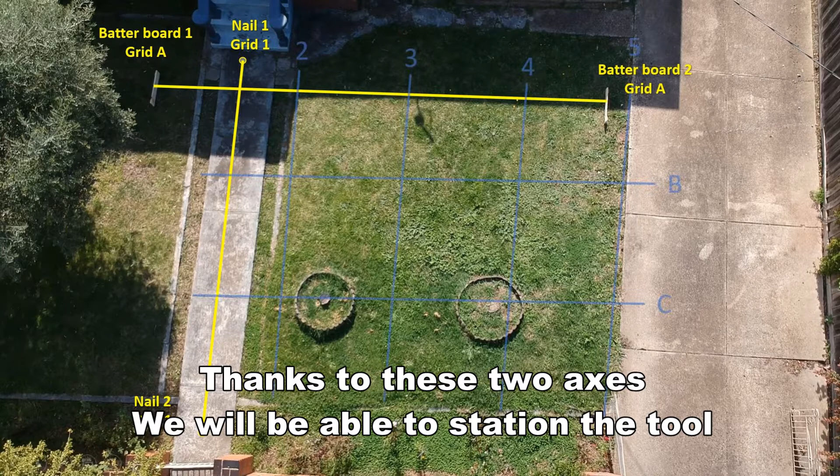In this video, we're going to see how to station the tool thanks to two building lines. On this site, we have two nails on the ground and two batterboards. The two nails are showing grid number 1, and the two batterboards are showing grid A. Thanks to these two axes, we will be able to station the tool and then lay out all the axes and the full building itself.

The first line I'm going to use is grid A, from this batterboard to the one over there. And grid 1, from this nail to the one over there.

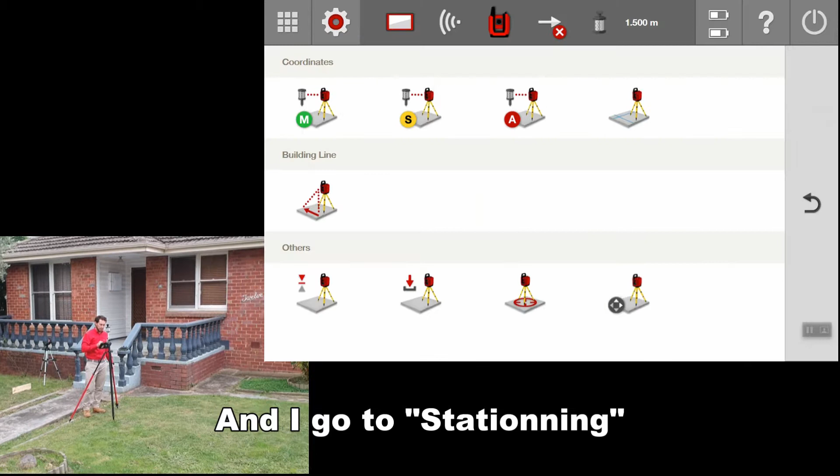I select the project I'm going to work in, and I go to stationing. Thanks to building lines, which is the fourth option, I take care about the warning.

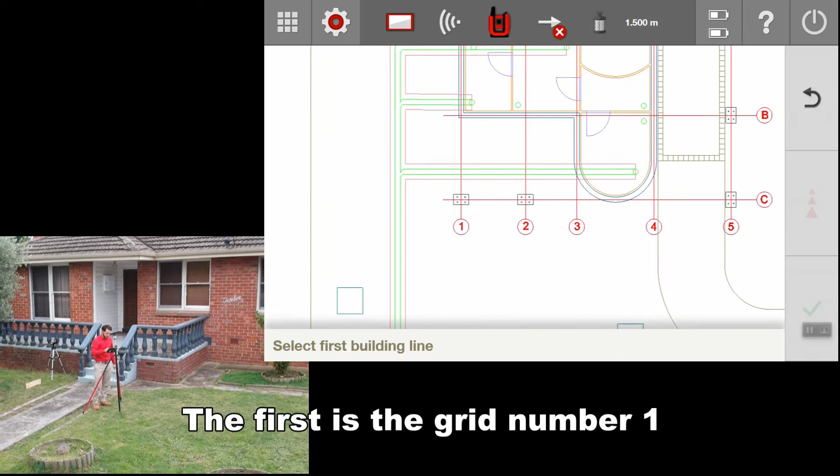Now I select the first line, as asked on the bottom of the screen. The first is grid number 1. I first need to lock my tool on the prism. I click on the arrow on top of the screen, it turns on the video camera streaming. I need to push on the red cross. I hold my finger on the screen and then move it. When I see the prism, I can click on it.

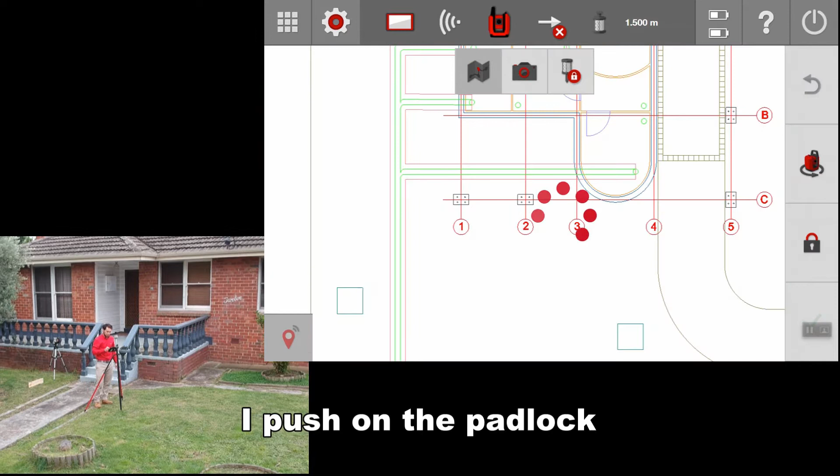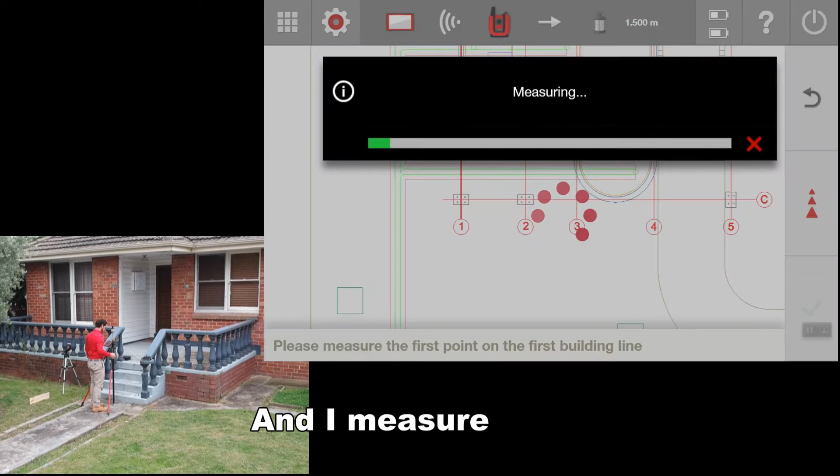I push on the padlock. If the arrow on the top is not crossed anymore, I am able to take the measurement. I go to my first point, plumb my pole, and I measure. I go to my second point and I do the same, and I measure.

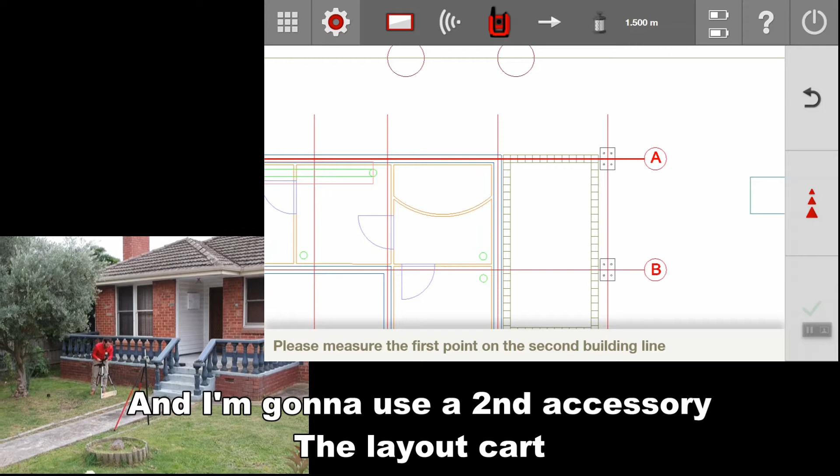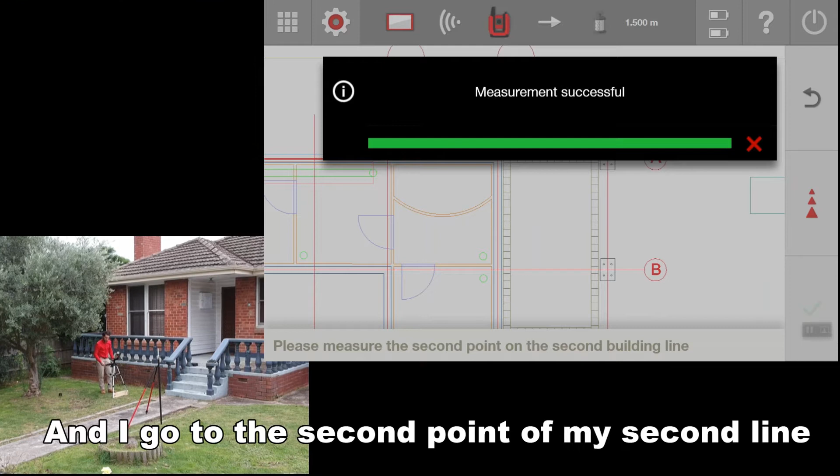I select my second line. I go to the first point on the second line, and I'm going to use the second accessory, the layout cart. The laser is aligned with the prism, so the dot here on the nail is exactly the center of my prism. I measure. I go to the second point of my second line, I adjust my laser on the nail and I measure.

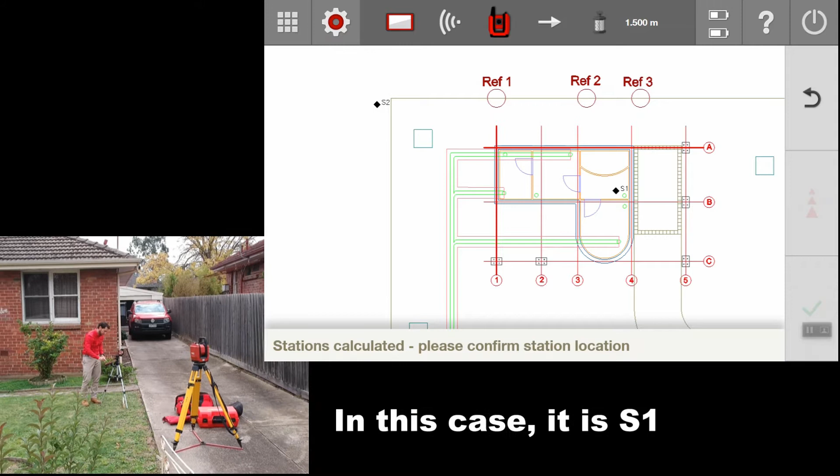Now, thanks to these two grids, the tool could be in two different locations on site. S1 and S2 are the two possible locations of my station on site. I need to understand what is the real position of my tool. In this case, it is S1. I select it and I tick.

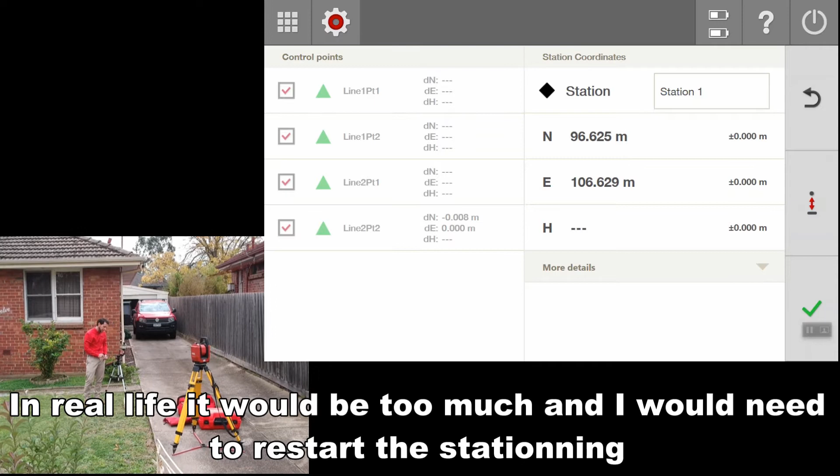This space is a deviation of stationing. I can see on the left-hand side of the screen that I'm out of square by 8 mm. This mistake can come from my surveyor or from my measurement. In real life, it would be too much and I would need to restart the stationing. The stationing enabled my tool to know its position in north and east.

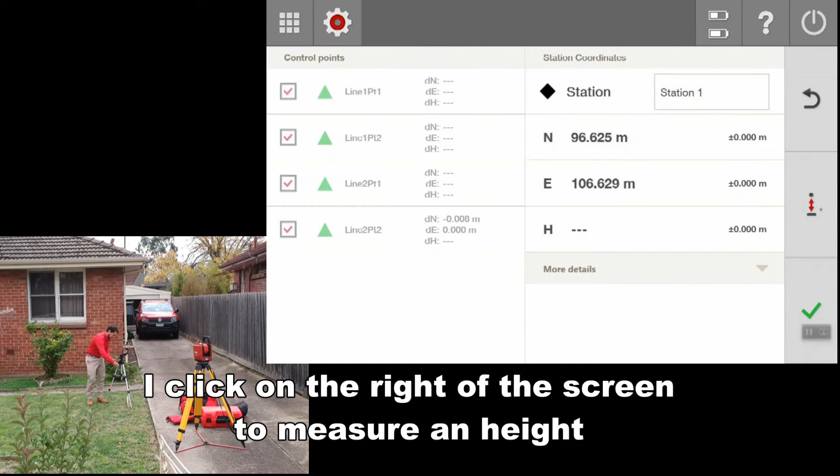Now I'm going to measure an RL to know what is the height of the tool. I click on the right of the screen to measure height. It brings me to this screen. I go close to the wall where my RL is marked.

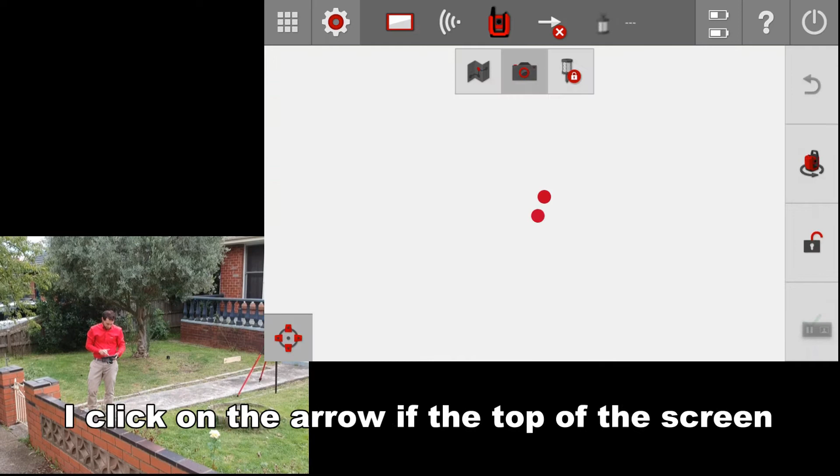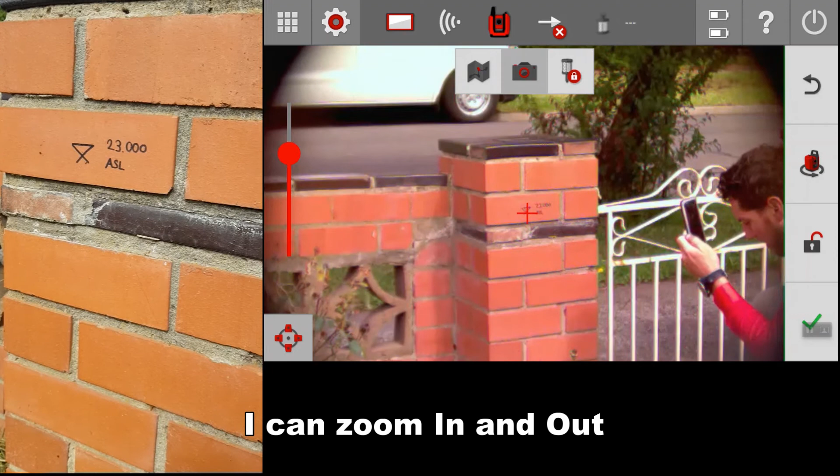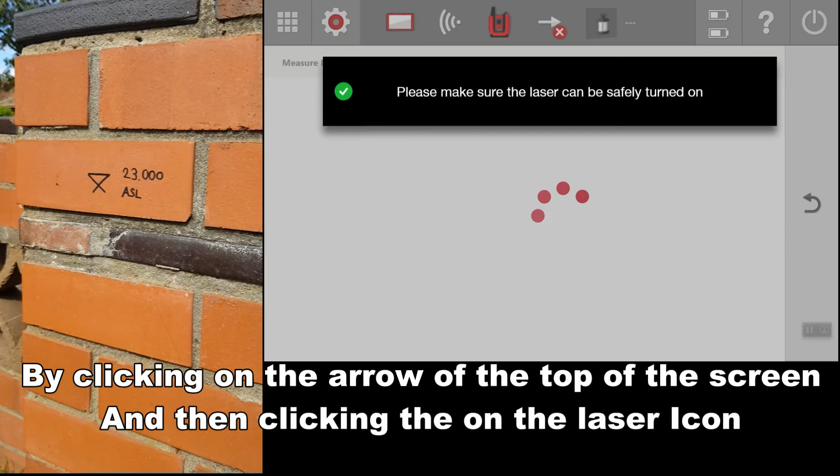I need to turn on the video to bring the dot to the wall. I click on the arrow on top of the screen and make it move to my direction. I can zoom in and out thanks to the cursor on the left-hand side of the screen. At the moment I am in prism mode. I switch to laser mode by clicking on the arrow on top of the screen and then clicking on the laser icon. Take care of the warning.

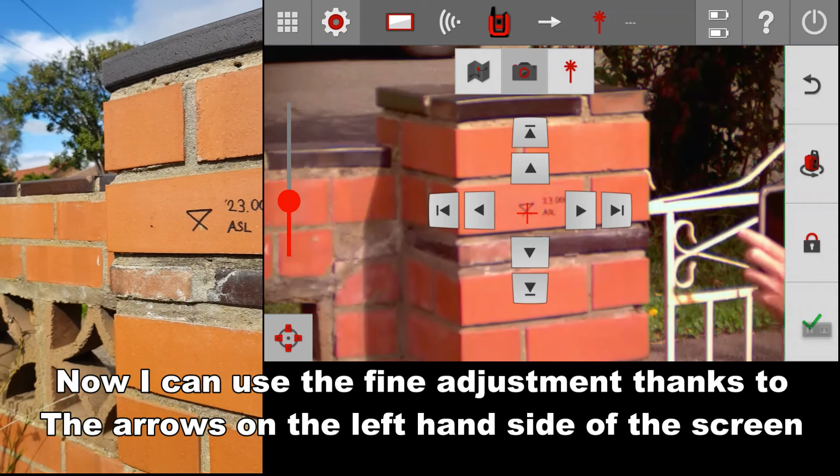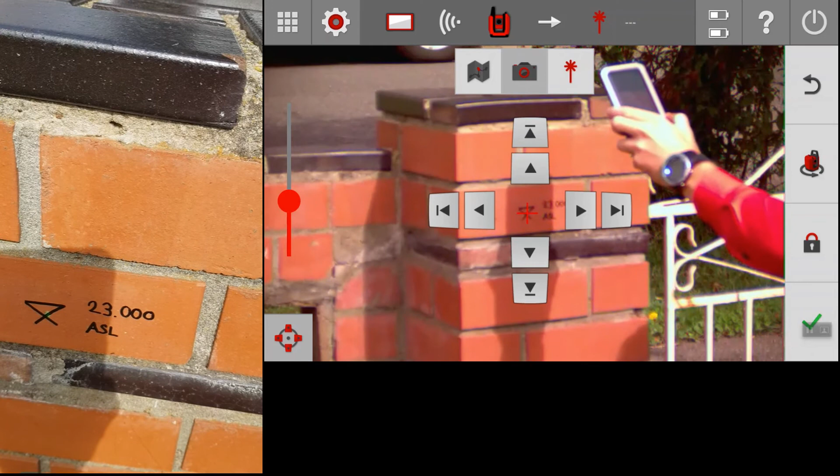Now I can use the fine adjustment thanks to the arrows on the left-hand side of the screen. I'm going to move roughly 1 mm with the little arrow and 1 cm with the big one. When the red dot is exactly on the mark on the wall, I can measure.

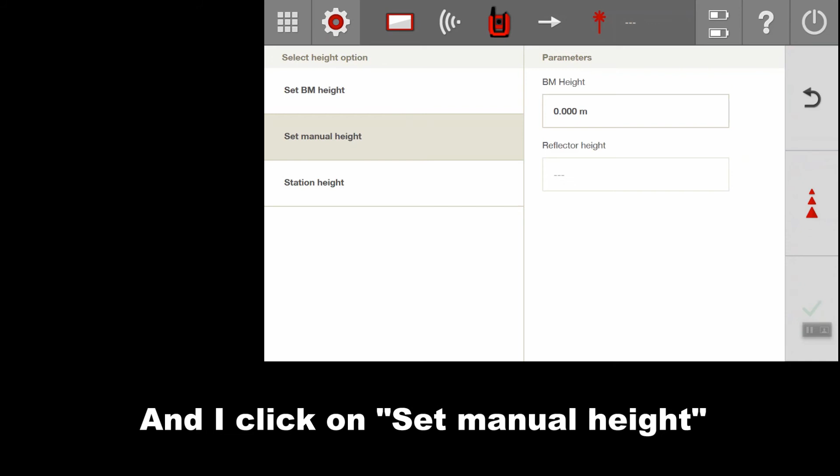First, I tick on the right-hand side and I click on Set Manual Height. The BM height is benchmark. I write it here, then enter, and then I click on Measure. I tick. Now my station is defined with a height. I tick again and I can do my layout.